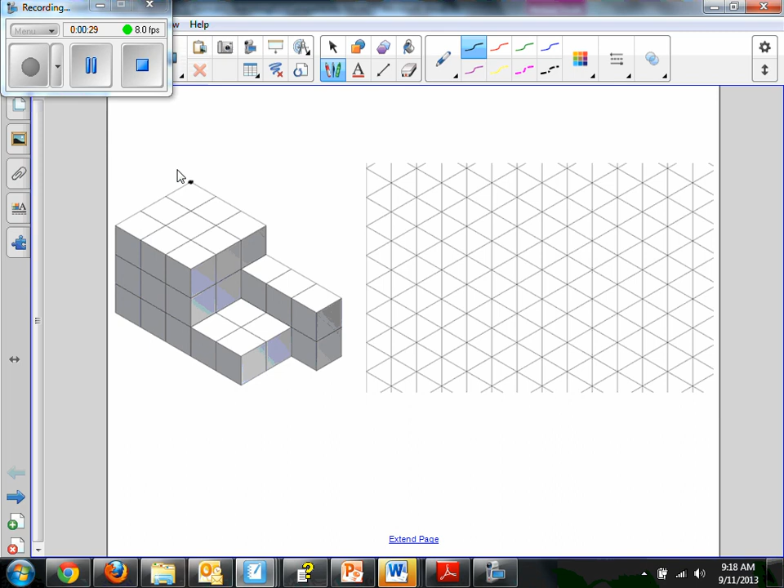So generally, on these kind where you have limited space on your isometric paper, you want to start by building your construction box from the top and giving yourself plenty of room. So on this one, if we start right here near the top, we'll be able to fit our entire object on there.

Okay, so first I want to count our depth. So it's 3 spaces: 1, 2, 3. And I'll put a dot right there.

Then I'm going to do our height. Again, our overall height is going to be 3: 1, 2, 3. Then we want to get our overall width, okay?

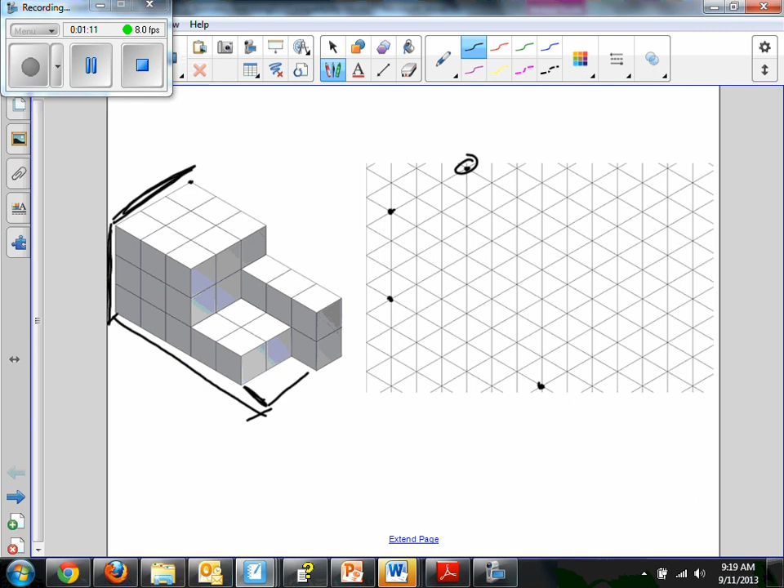I want to be careful that I count the entire width, not just the part touching this front edge. So if I were to count 5, that's not quite all the way, so I need to count this space right here for number 6. So 1, 2, 3, 4, 5, 6. And now we can see, since I started up here, I have enough room for the dot down here so that the entire box will fit on there.

Okay, so now I just want to finish creating the rest of my construction box. So it's 1, 2, 3 for my depth here, then 1, 2, 3 for the height here, and then I need to get this other corner that goes in right here.

So from there, I want to use construction lines, which you guys are going to draw as very light pencil lines. I'm going to use this dotted line so that you can kind of see the difference.

Okay, so what I'm doing is I'm creating basically either a glass box, which is the example they use, or the UPS box that your object can fit in. So this would be the outside. Now the next step is I want to fill in these surfaces that are touching the edge of the box.

So I'm going to start with this top one. Let's do that in yellow. So I'm going to start with this one.

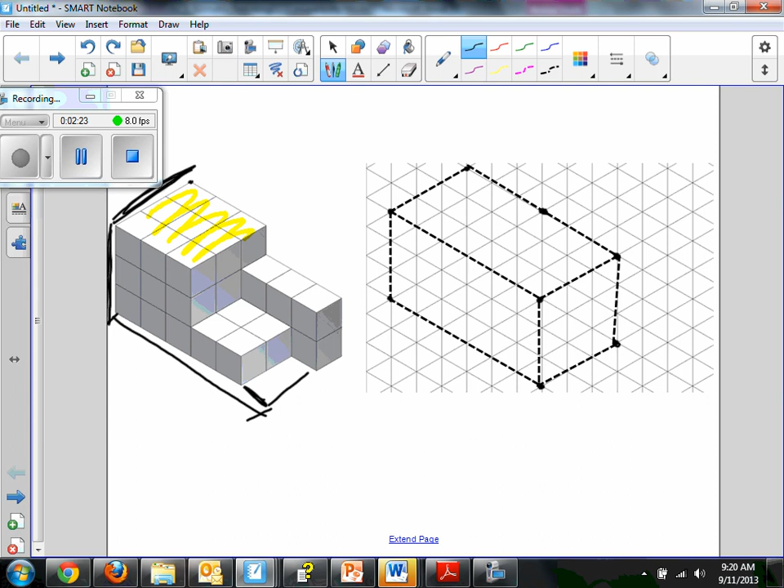So I'm going to do that by counting from the top edge: 1, 2, 3, placing a construction dot there, and then 1, 2, 3. So that's my next one. Okay, and I can go ahead.

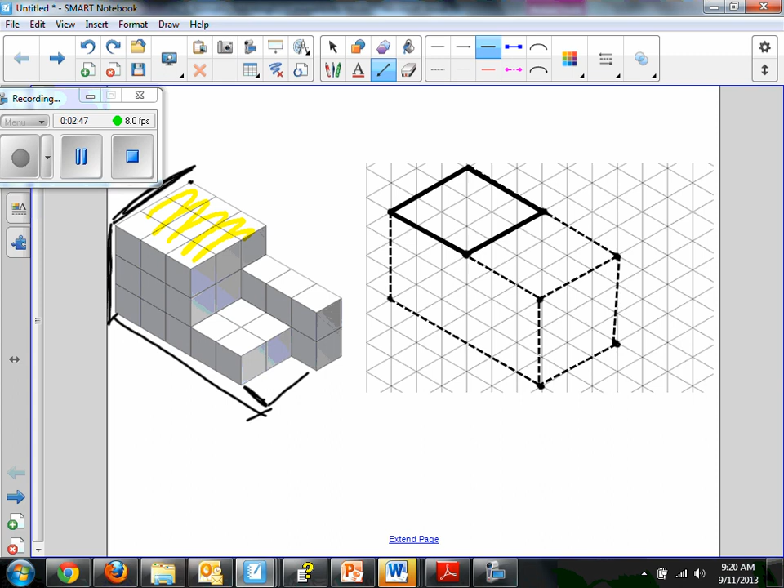You can either fill in all your construction lines first, or you can go one at a time. So for example, I can do my construction line there, and then if I want to keep myself from getting confused, I can go ahead and do my object lines for that top part. Or once you get comfortable, you can go ahead and do your construction lines for all of the surface parts.

So next we're going to do this front surface right here.

Okay, so I can see now that it's going to go from the spot I already have here, down 2, then 1, 2. And then it's not going to go all the way to the edge of the front corner of the box. So from that dot I have here, I'm going to count 1, 2 in the width. So 1, 2.

Add my dot down there, and that should give me the front edge now. So I can go ahead and use my construction lines to fill that in. So right there, and then down. Okay, we'll switch to our object lines so that I don't confuse it with my other construction lines, and I can go ahead and fill in the outside edges of the box that were previously construction lines.

Okay, and now I've just got this front surface left, so we're going to do that one next.

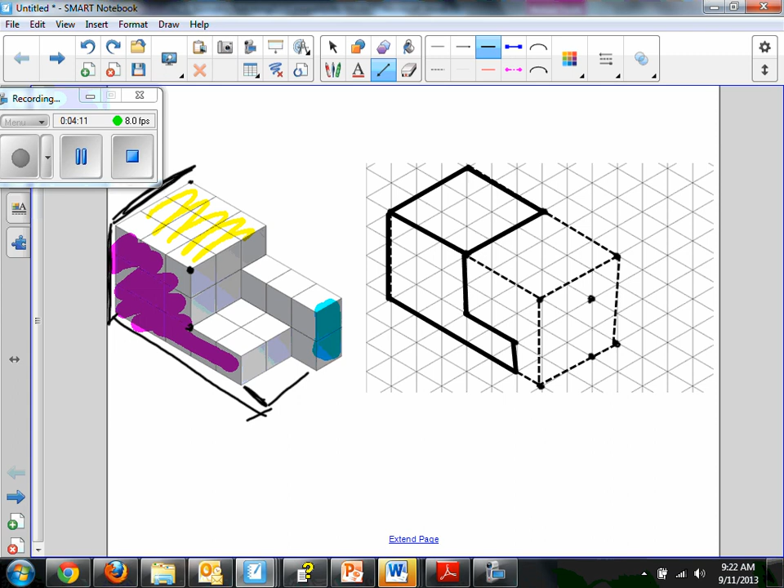So I'm going to count from the back right corner. And I know that the depth is only 1 for this one, so I'm going to put a dot right there. And then the height is going to be 2, so I'm going to go right there. And again, quickly, we're going to use our construction lines, and then go ahead and fill them in with object lines.

Okay, now we get to the part that's a little bit tricky, because now we've just got to use our spatial relations to get the other inner parts drawn in. Now on this one it's not too bad, but once we get to some more complicated shapes, it will start to get a little bit more difficult.

So on here, I'm going to start from this guy right here and just count 2 back in my depth. So I'm going to go 1, 2. There's my construction line right there. All right, and then from there I'm going to go 1, 2, and I'm going to put a dot right here.

And from there, it goes downward. So we're going to go down one right there, and then that's going to fill in all these inner parts. So before I get lost with which dots I'm doing, I'm going to fill in my construction line. So I've got one there, down to there, over to here, and then I want to get this surface as well.

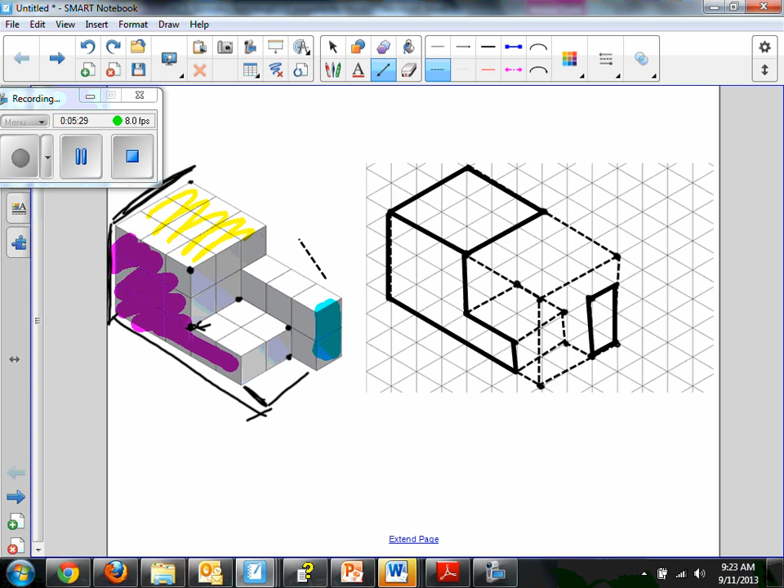And so then really all I have left is this section right here. Is this section right here. So I'm just going to count up one dot from there and then back one dot. So I'll go up here and over here. I can fill in my construction lines, and we'll actually go before we do those and do object lines for our previous part, just to avoid confusion again.

Okay, and now we've got, all we have left is this section right here. And it travels all the way up to the front. So then once we fill that in with object lines, we'll have a nice replica of the object.

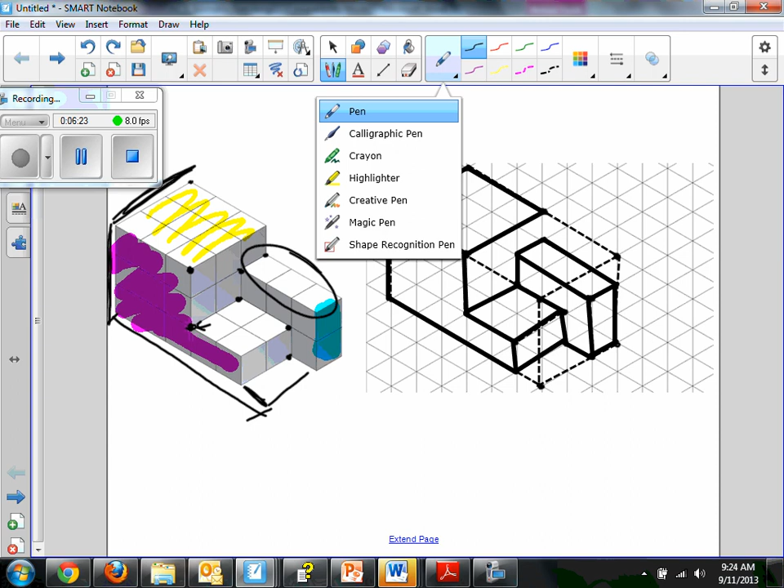Okay, so then our last part is to just shade it in. So you're going to pick one side. You want your source of light, we're going to have it be - oh, I left one line out. We need to go back to our object line right here. Fill that one in.

Okay, so then we're going to go and we're going to shade it in. And I'm going to pick my light source to be hitting it from the top, kind of like in our example over here on the left side. And we're going to do a light shade on the side right here and a darker shade over on this side. So we'll pick light shade and fill in right here. When you guys are doing this, you can just fill it in with pencil and then use your finger to kind of smooth it out so it appears more natural shading.

Okay, and now we're going to take our front face and we're going to fill that one in with a little bit darker shading. And that is an example of how to do an isometric sketch.